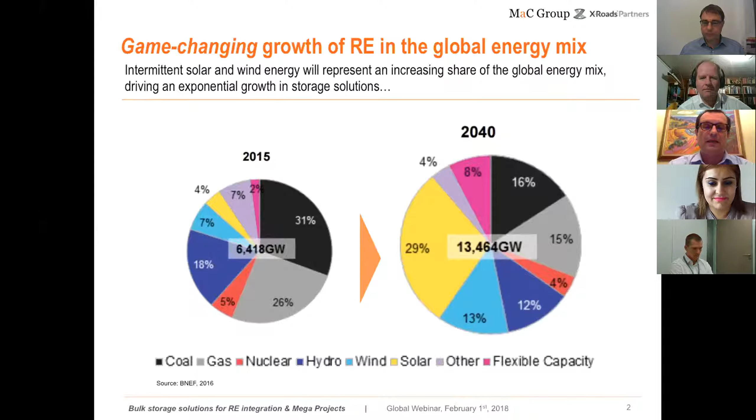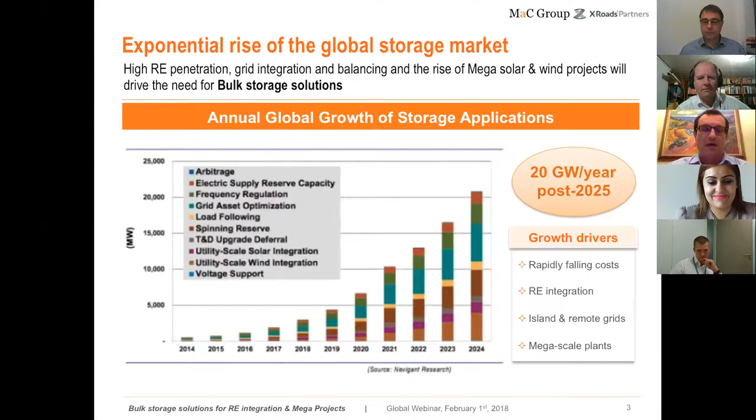The global storage market is forecast to grow at an exponential rate over the coming years, reaching annual deployment of over 20 gigawatts of storage solutions a year by the middle of the next decade. As the graph shows, the integration of utility-scale solar and wind projects will account for a large part of this growth, as will grid ancillary services and load shifting of renewable energy generation to balance electricity demand and supply.

Bulk storage refers to that segment of the storage market that responds to grid-level balancing needs, with storage solutions of hundreds of megawatts to several gigawatt-hours of storage, with discharge times of several hours per discharge. Today, the only fully mature bulk storage technology that can meet this need is pumped hydro storage.

And the strength of demand for bulk storage solutions is clearly shown in that, in addition to the 170 gigawatts of installed pumped hydro storage plants today, there are over 100 new PHS projects in planning or under construction globally, representing an additional 75 gigawatts of new bulk storage capacity.

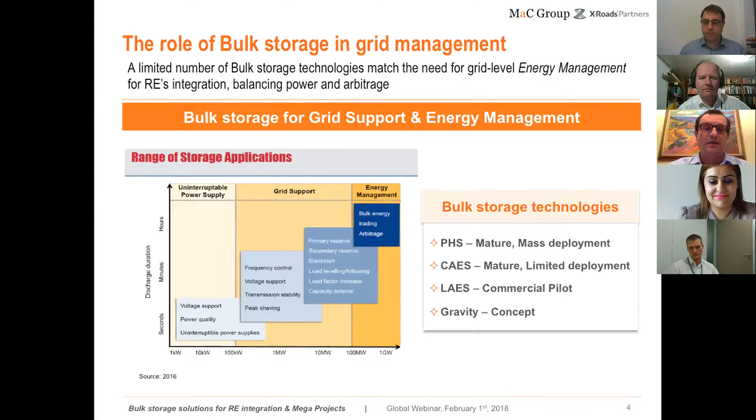However, pumped hydro storage faces significant deployment challenges due to topographical and hydrological constraints, as we shall see later. Therefore, there's been an increasing focus on more flexible alternative technologies, such as compressed air energy storage, liquefied air energy storage, and gravity-based solutions. To date, the commercial deployment of these new technologies has been very limited, but the need for more flexible and cost-competitive bulk storage solutions remains, providing a fertile ground for innovative technologies.

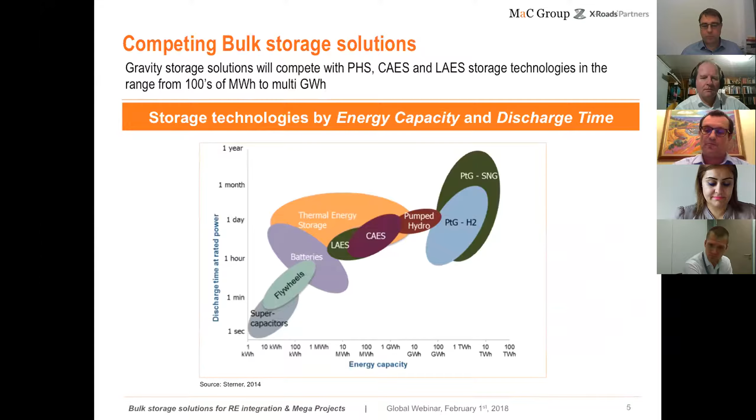In addition to the ubiquitous increase in renewable energy generation, there is a further phenomenon fueling the need for bulk storage solutions globally, and that is the rise of the mega or multi-gigawatt solar and wind project. Over the past years, there's been a clear trend to the build-out of solar plants and wind farms of many hundreds of megawatts in capacity, as well as the planning and start of construction of multi-gigawatt solar and wind projects and hubs. We are now regularly seeing the records for capacity installed at a given site being beaten, for example the planned 10 gigawatt solar PV site being developed by Adani in Rajasthan, India.

We are also seeing the planning and commercialization of nodes of solar and wind energy focused on a national or often interregional market with high capacity, high efficiency transmission networks, allowing the flow of green energy between supply and demand across regions and grids. The example of the Asian Renewable Energy Hub, with a combined 6 gigawatts of solar and wind power generation, aptly shows the scale of future renewable energy production and the consequent commercial attractiveness of gigawatt scale storage solutions.

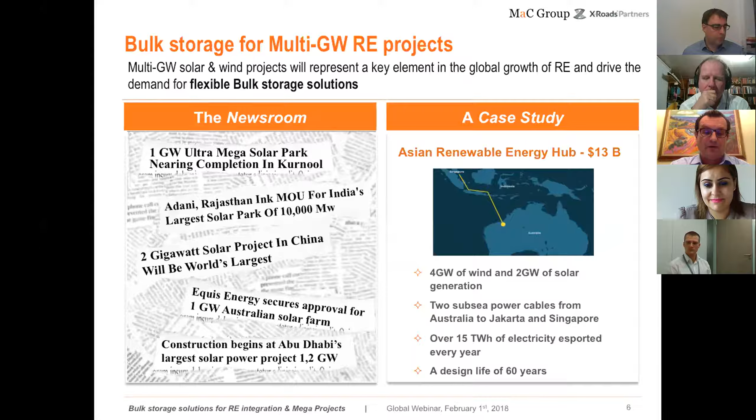In my last slide, one can see that pumped hydro storage solutions are already being deployed to support ambitious growth of gigawatt scale solar and wind generation, such as the Al Hattawi pumped hydro storage project that will support the grid integration of the planned 5 gigawatts of solar power from the Mohammed bin Rashid Al Maktoum Solar Park in the United Arab Emirates. However, pumped hydro storage has many limitations in terms of the sites where this technology can feasibly be deployed, due to the very unique topographical and hydrological conditions that limit the degrees of freedom for its deployment.

There are and will be many, many locations where only more flexible bulk storage solutions can feasibly be deployed. It is here that new, flexible, and cost-competitive bulk storage solutions will find their market. Let me now hand on to my fellow speaker, Oliver, who will discuss the cost competitiveness of alternative bulk storage solutions with some very interesting conclusions.

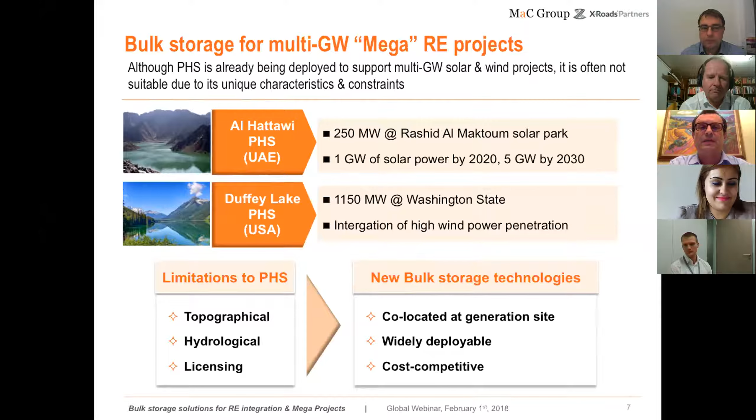Yes, can everyone hear me now? I think it should work, yeah. Yes, we can hear you perfectly. Thank you, Belen. Thank you very much.

I would like to talk about how to assess the cost of electricity storage technologies and then apply this to bulk storage technologies. What I will present is the result of my research at the Grantham Institute at Imperial College, and a project I conducted together with Heindl Energy.

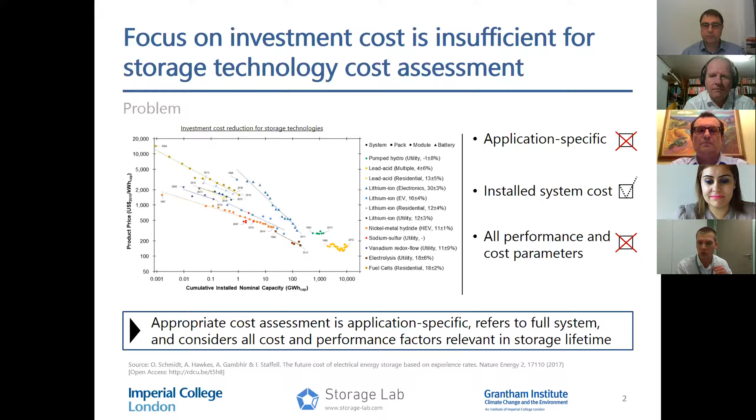And that's because of three reasons. First of all, rarely are these investment costs application specific; they might change whether you want to use one and the same technology for bulk storage or for frequency response. Also, investment costs are not always referring to a fully installed operational system, but sometimes to the cost of battery packs or cells only. And most importantly, we only consider investment cost and not operational cost or replacement cost, and we do not consider crucial performance parameters like the round-trip efficiency of a storage technology or the usable storage capacity. That's why an appropriate cost assessment of storage always has to be application-specific, refer to the entire system, and consider all cost and performance parameters relevant throughout the storage lifetime.

And this is where levelized cost of storage come into play. This metric quantifies the discounted cost of the discharged electricity.

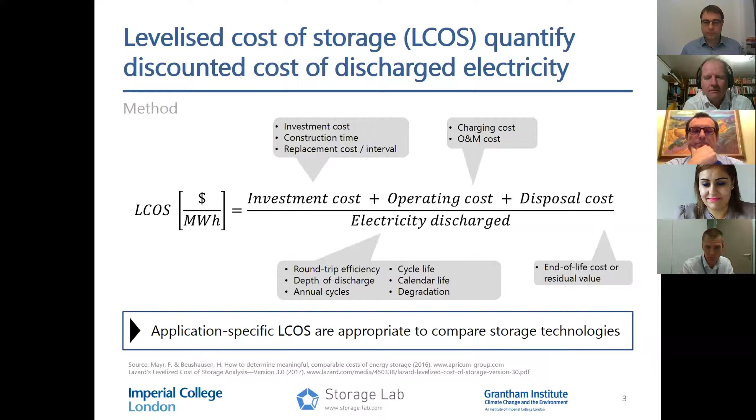Although there has been some great work on LCoS by the consultancy Apricum, or by Lazard's levelized cost of storage analysis, it's still a relatively new metric. And I would just like to highlight a few points you should be aware of.

In this slide, you can see the different cost components of levelized cost of storage, and these are things to be aware of. I'm going to highlight the ones that are maybe not obvious. The first are replacement costs, which sometimes tend to be forgotten or are included as an annual share in the operation and maintenance cost, which is not the right approach to take.

The next thing to highlight is charging costs. In some levelized cost of storage analyses, these are excluded based on the argument that the power price is not intrinsic to storage technologies. People who do that then differentiate between levelized cost of storage, excluding the charging cost, and levelized cost of discharged electricity, including these costs. However, when you do that, you also neglect the round-trip efficiency of the storage technologies. That's why common practice now is to include this and call it levelized cost of storage.

The last thing I want to highlight is the other cost component, which I didn't include on the previous slide. These can be taxes, for example, and they only apply if you have a very location-specific project in mind already, where taxes would matter. If you only want to compare different technologies, you can exclude this cost factor.

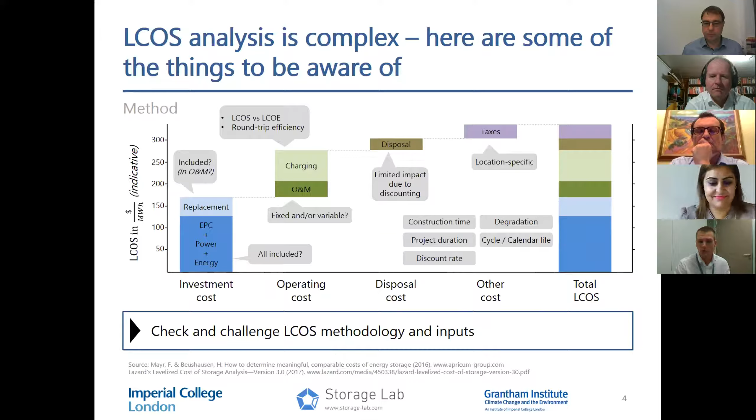So I think now we're ready to perform a levelized cost of storage analysis ourselves for bulk storage application. On this slide, you can see the input parameters that we are using. These are the substance of any levelized cost of storage analysis.

You can see the application parameters that are given by our application, bulk storage, and you can see the technology data that we're using. I would like to highlight that the first four technologies you can see are the most widely deployed storage technologies on the planet, which is why we chose them, and they're also used for bulk storage, in particular the first two.

The data we're using for them comes from, in my view, credible literature sources that build on manufacturer quotes and actual project data. The fifth storage technology is gravity storage, and the cost and parameters you can see here are the ones anticipated by Heindl Energy.

I would really like to highlight—my light just turned off—that you should really take a critical look at these input parameters because, as I said, they're the substance of any levelized cost of storage analysis.

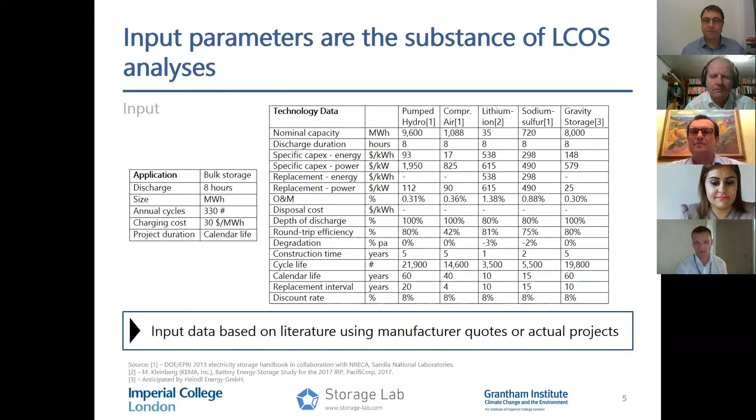Now let's take a look at the results. On this slide, you can see the levelized cost of storage on the y-axis in dollars per megawatt hour of discharged electricity, and on the x-axis, you can see the different storage technologies.

It appears that gravity storage comes out as the most cost-effective storage technology in bulk storage application. This is because of the relatively low costs associated with the components that store the electricity and the moderate cost of the components that charge and discharge the electricity. So the costs are around $148 per megawatt hour.

The next cost-effective technologies are pumped hydro and compressed air at around $200 per megawatt hour. These technologies benefit from very low costs associated with the components that store the energy, but they also have relatively high costs associated with the components that charge and discharge the electricity. Lithium ion and sodium sulfur come out above $500 and $300 per megawatt hour for bulk storage application.

You can see that for all storage technologies, the investment cost component, here called CapEx, is the most significant cost driver. The charging costs, or P-elect, are the second most significant cost driver. And finally, I would like to highlight the error bars. These represent the levelized cost of storage results of Lazard's study in 2016 for the same technologies in a similar application, and we use these to qualify our results.

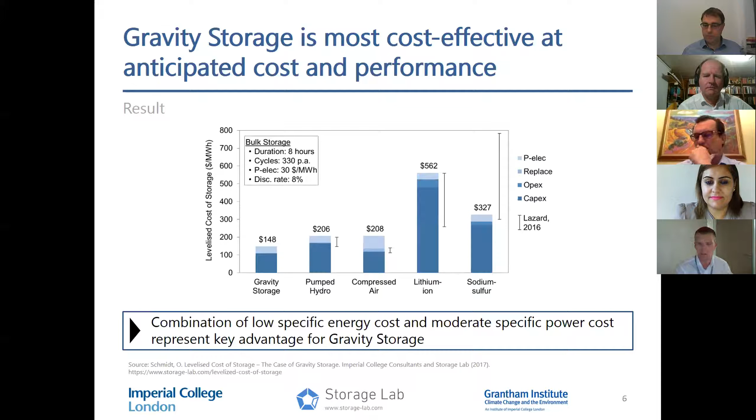For lithium ion, we're at the higher end of the range because we consider the degradation of the technology, which is not considered in Lazard's study. Although the same is true for sodium sulfur, here we are at the lower end because the investment costs that we assume are below the ones assumed by Lazard. So I think this is a prime example of how the methodology, for example including degradation, and the input data are really the substance of any levelized cost of storage analysis and can significantly impact the results.

Finally, I would look at the sensitivity of our results as a result of the discount rate and the project duration. We can see that a discount rate of 4% compared to 8% has a significant impact on reducing the levelized cost of storage for all five technologies, since a lower discount rate reduces the discounting of all the electricity discharged over the entire lifetime of the technology. Those technologies with a long construction time and operational lifetime benefit the most.

Gravity storage with a discount rate of 4% could be pushed below $100 per megawatt hour. And lastly, project duration: if you were only to look at a storage project that you want to operate for 11 years, which in this case would be the construction time and operation time of lithium-ion batteries, the levelized cost of storage for lithium-ion wouldn't change. However, for all other technologies, they would significantly increase because you're basically disregarding all the electricity that could be discharged over the operational life of the technologies. This again affects those technologies with lifetimes of up to 60 years the most.

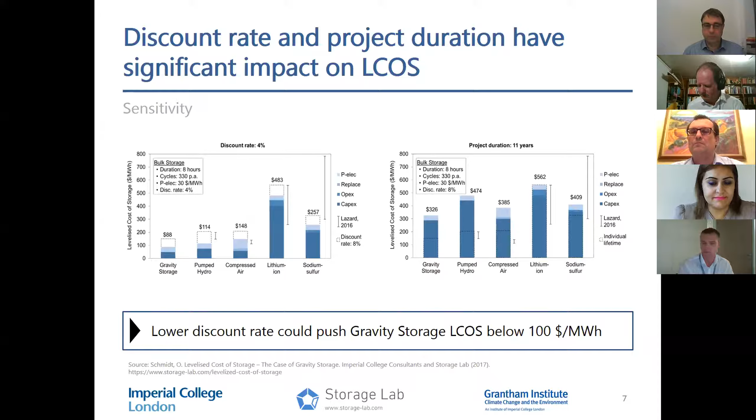And this is the end of my contribution. I'm looking forward to all the questions you have. I also invite you to look at the website of Storage Lab, an independent research hub led by me, to see all the findings we have about electricity storage technologies. Thank you.

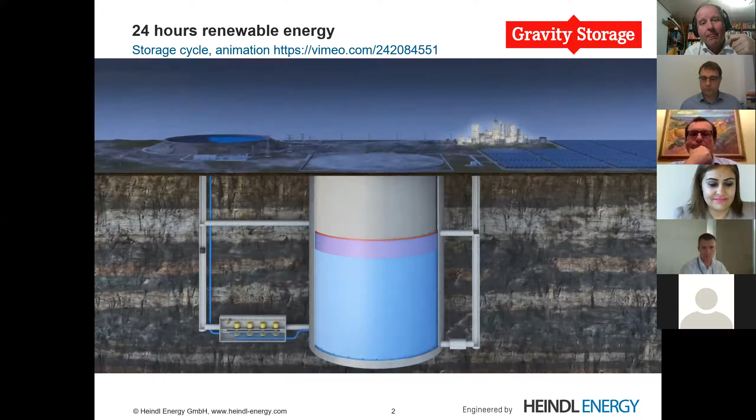The first thing is, let's look into the cycle of this storage for 24 hours. What happens during daytime: we have solar, and the energy is going into our pumps, pressurizing water below the piston. This piston lifts and stores the energy in gravity. Now at nighttime, the pressurized water goes through the turbines, generating electricity and supplying it to the grid, so that we have electricity during 24 hours. So this concept, let's look a little bit deeper in there. The really interesting part is the piston.

That is natural rock that was already there, and it is excavated by us at this place. So we don't have to move too much material, and the piston itself is stabilized where necessary.

Below the piston is the pressurized water. We are working with a pressure of about 70 bar, which means the pressure is very similar to pumped hydro. That gives us the advantage that we can use well-known pumped hydro technology, including the well-known efficiency of the systems.

We also need a water pond to have the water available, and we bring the water between the pond and the lower part of the piston. That means we have to fill it once, and then it works forever with more or less the same water. So we don't have a water problem in a desert, for example.

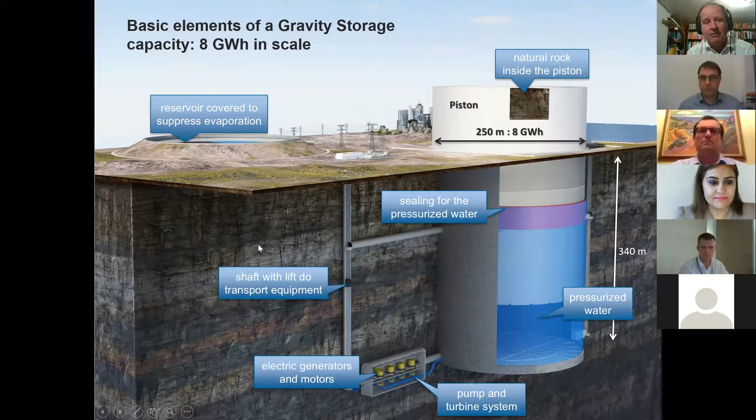The size matters here very much. If we have 250 meters, we have 8 gigawatt hours of storage, and it is 340 meters deep. That's quite a bit deep, so we have to understand how we build that system.

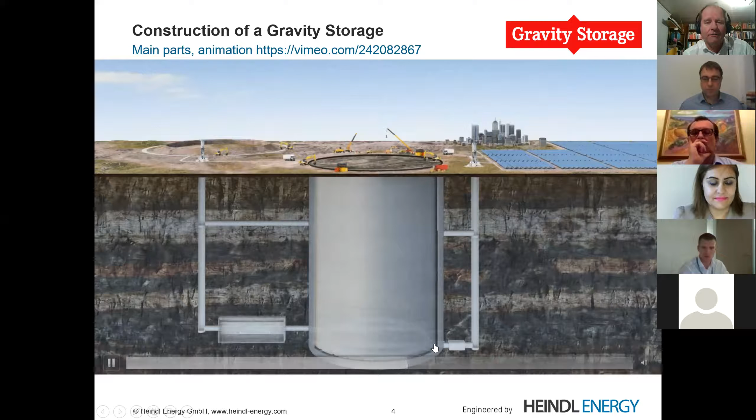Here we have a short animation. After clearing the site, we start at the center where the piston is coming, and we drill down shafts for the equipment. Then in parallel, we meet down there and cut the lower part of the piston. Then we bring in building for the turbines. The last big step is introducing the sealing ring, which is a very interesting part. And of course, the water pipes for high and low pressure.

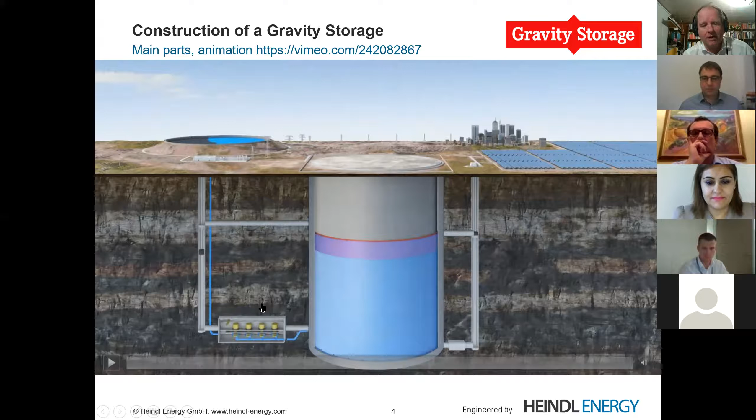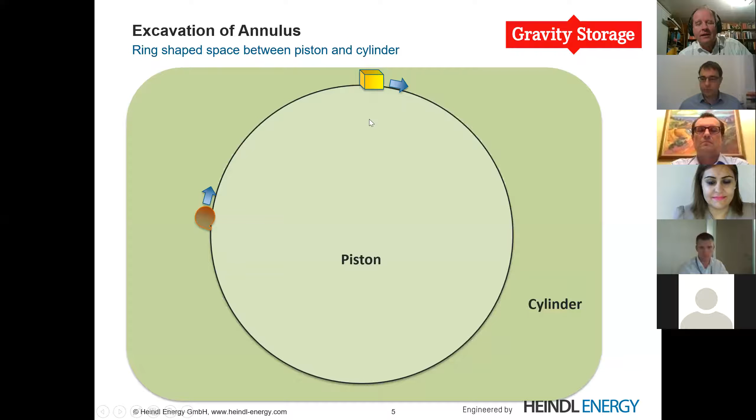This system now in some more detail. The excavation of the annulus needs equipment that can cut hard rock. There are three ways available today: drill and blast, which we don't prefer because it may destroy or weaken our piston; a cutting machine as well known in the mining industry; or a wire saw, a new and very efficient way to cut rock.

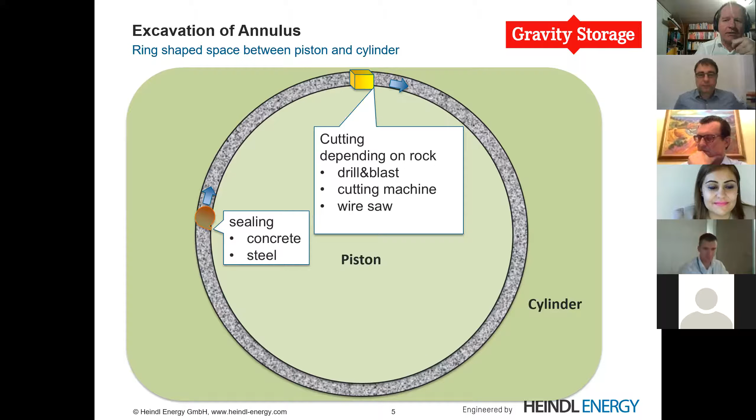Then the cutting machine goes down deeper and deeper, all the 340 meters. The other thing we have to do is make the surface of the rock waterproof. We don't want to interfere with the environment, and we don't want water spilled out in the high pressure part. So we use concrete and steel, which is the material of choice because it gives us easy production.

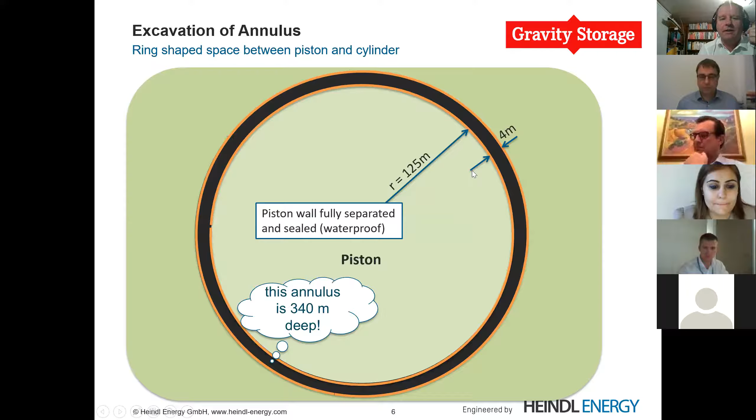So after that is done, we look into an annulus that is 340 meters deep, and we have now a piston of 125 meters with an open width of 4 meters. How do we make that work for the bottom? That is the separation of the piston base.

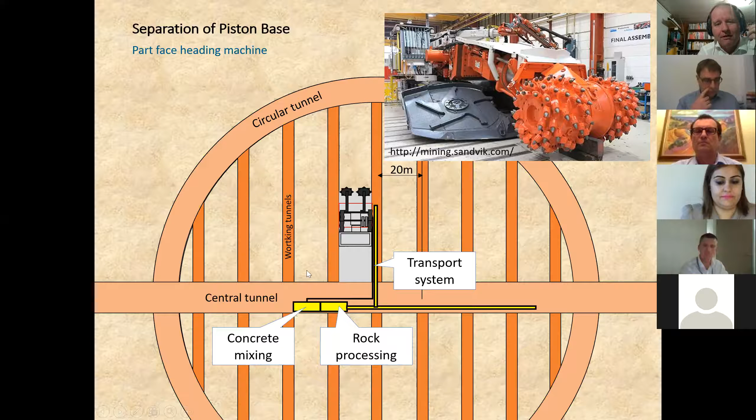Here we use a central tunnel and some smaller tunnels for work, along with concrete processing and a so-called part face heading machine, well known from mining. Now we have to cut these pillars here, and we'll look into the detail of how this is operated.

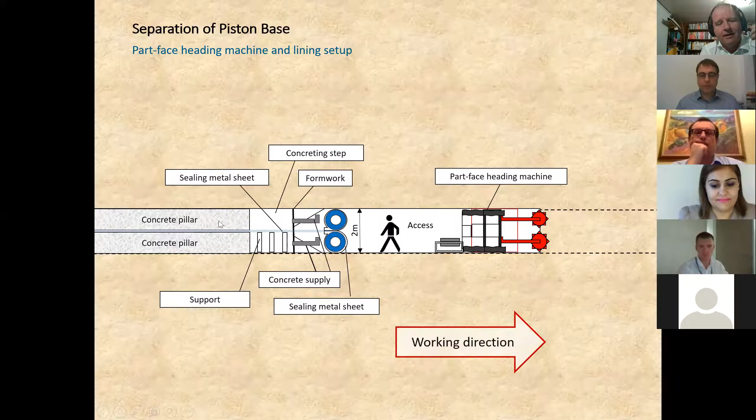We cut through the rock, and we don't want the rock left open hanging here. So immediately after that, we introduce two shields of metal and concrete at the lower and upper side, resulting in very stable pillars. The sealing and the material of the seal is more or less the same as you see on a conveyor belt.

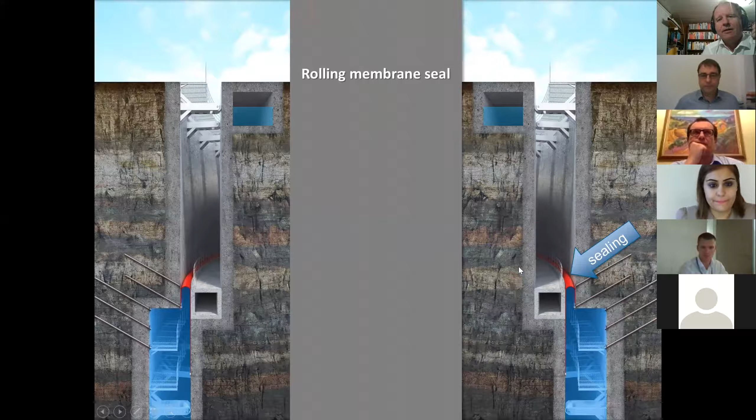Now move up, and you see the seal running here along. The advantage of this technology is that we have a self-centering system. We can control the high pressure because all this material is well known.

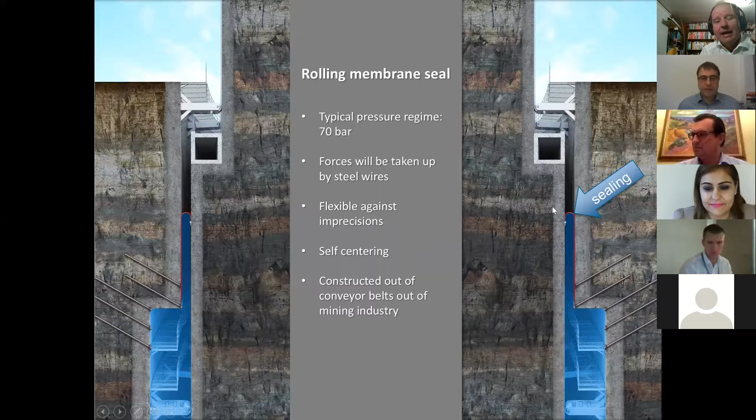Where can we build something like that? The point is that we need solid rock without too many faults. That is available in many places. We did a global study together with DMT, about 120 sites where boreholes were available, and we found that about half the sites have suitable rock, with some really excellent for our technology. So we would usually start at the best places, and I think we have enough places.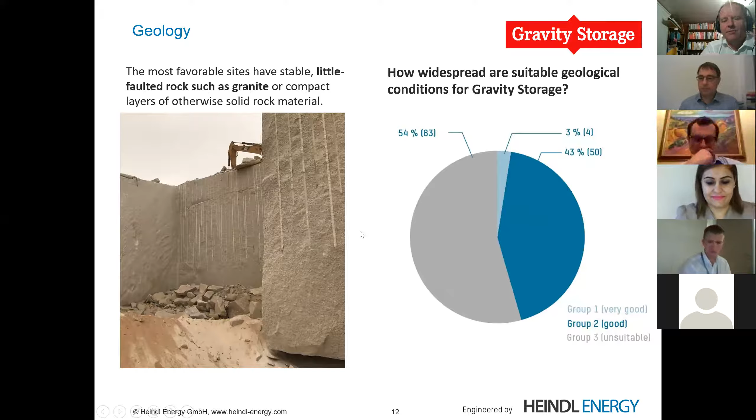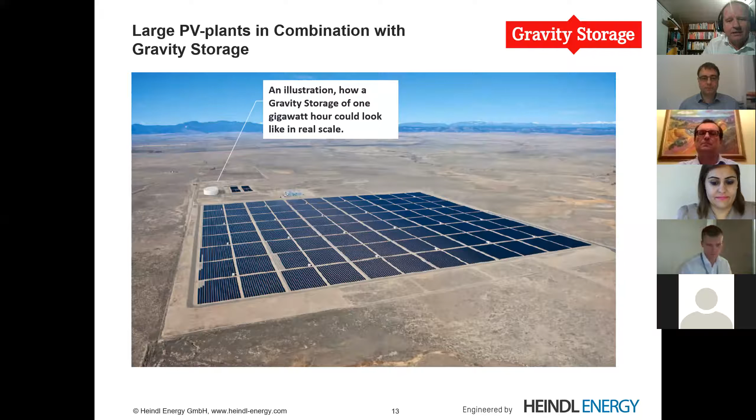To give you an impression of how large the system is, here we have a big solar farm, and we see the comparably small gravity storage. This storage is enough to store a whole day of solar energy for this site, which is 1 mile by 1 mile and 120 megawatts.

Come to the conclusion: what do we have with our system? We have the applicability that we don't need elevations as we do with pumped hydro, which is a very efficient way. We have more than 40% of the Earth's surface that can be used, so we'll always find a place to do it. We have very high efficiency.

That was interesting for the levelized cost of storage, as we have learned. And we can use the system for many other services in the grid, for example black start, since rotating masses are very convenient.

Our discharging time can exactly be tailored to the operators, so we are not dependent on the amount of rock. We can use as many turbines as we think is the best solution for a special application.

And the last thing I want to go into detail on is sustainability. We have minimal raw material, just rock and water. Even if we dispose of the system at the end of its lifetime, there is only rock and water, so that's not a big problem. We also have a small land footprint and a small use of water.

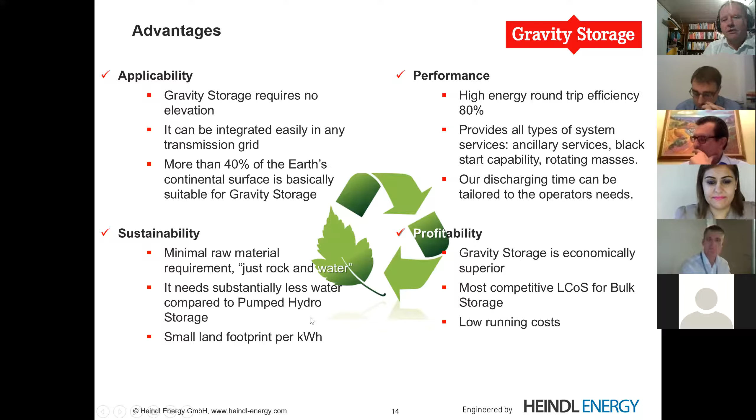So that's it for my part. Thank you for your attention.

Thank you very much, Eduard. There have already been a few questions about whether this is being done anywhere. So I think that this is exactly Robert's cue. You can just show us your screen, please, Robert. And I have to say, guys, you are doing great for time. You're doing a great job.

Thank you very much, Robert. Go ahead. Okay, thanks a lot.

Hello, everyone. I would like to add some information about the status of our development. And then finally, I would like to be more detailed on the economics of this system. And I want to invite you and trigger a discussion about how economically viable bulk storage is and what role it can play in the future supply.

Here you see a graph about our planned path for the size development. As Eduard mentioned, it is important to understand that this system will only be economically feasible if you have a certain size of diameter. So we have to develop this technology in several steps.

We did a lot of research in the last 4 to 5 years with theoretical studies and scoping studies, etc. Now is the time we want to transfer this into a proof of concept. That means we want to build a small edition of this system, 20 by 30 meters, and it will have no impact on a certain business case in the grid or so. It is just about testing the system and the sealing.

After this is completed, hopefully by 2019, we want to have a first pilot project, which will actually be connected to the grid, with about 200 or even 300 megawatt hours capacity. But still, we want to go for more and plan to have a first commercial size with 150 meters.

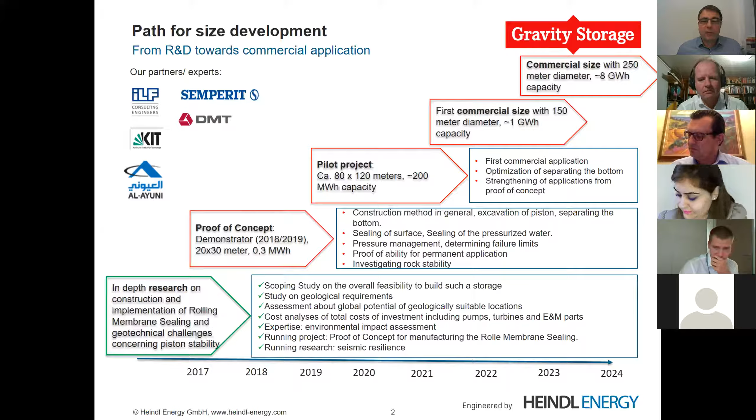On the left side, you see, just to mention it, a few partners we've worked with for years. We are a team of coordinators of several development projects and research efforts. We have a very close cooperation with Al-Ayuni, a construction and contracting company from Saudi Arabia. They have a lot of quarries, and they offered and invited us to use them to build such a demonstrator. Some of you may know that we have very nice geology, good granite, in Saudi Arabia.

It is a country with a lot of development in renewables, and they have the techniques and all the companies there to build this. So thanks for this invitation.

This proof of concept is to prove the technology, especially the parts which are very new. This is mainly the sealing, because all the other components are quite well known, either from mining, tunneling, or from pumped hydro. But the sealing, as Eduard showed, is tricky, and that's something we have to test in real scale, one by one, as we will use it in the commercial size later on.

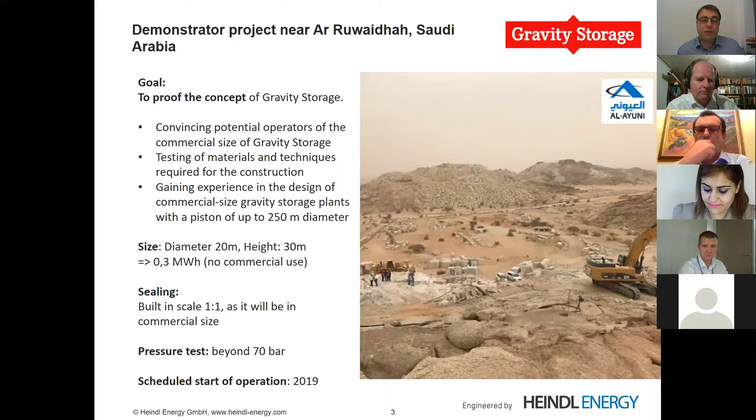We also create pressures beyond 70 bar with a special construction, so we can invite everybody to test themselves, to make measurements, to do research, etc. The plan is that we can start operation of this testing site in 2019.

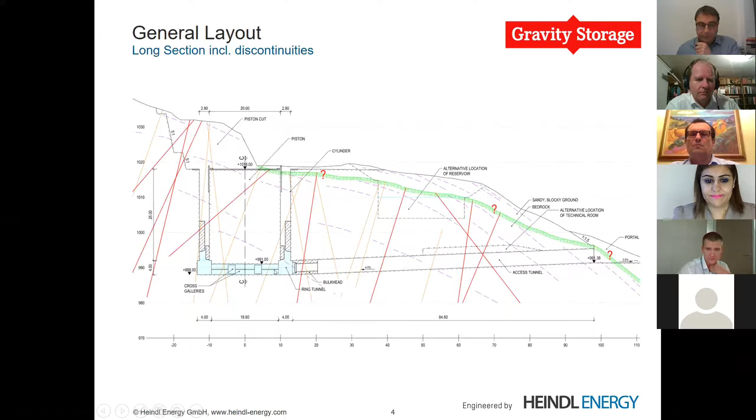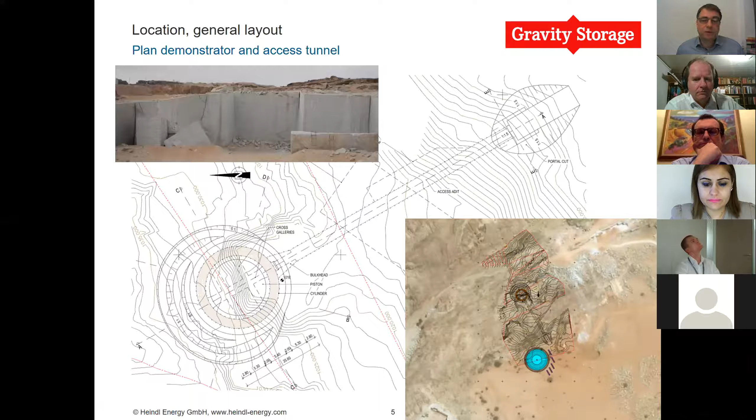This is a view from the top, and here you see actually the site where we want to build it. And from the top, you see the water reservoir in the blue, and here's the terrestrial survey. And so that's the way how we do the assessment of sites when we do this project.

Okay, let's talk about money. The revenue models for gravity storage are the same as we know it from bulk storage, but I think we have to discuss what are the revenue streams for bulk storage in future.

You probably know that we have three basic models, like a traditional arbitrage model or PPA. You produce during the day with wind or solar, and you take part of it to transfer it to the night. And the big vision behind bulk storage and renewables is that sometime we want to be able to deliver 24/7 with renewables. This is something which is highly attractive in terms of economics. And that's why we definitely will need bulk storage to cover these huge amounts of electricity.

But you know that a lot of grid operators are really worried about the stability of the grid. And we analyzed what is the reason why at present so many pumped hydro storages are in planning. And the reason is that they need capacity to balance the grid, to provide balancing power, to do voltage support, etc. And this is very important, and it's getting more important.

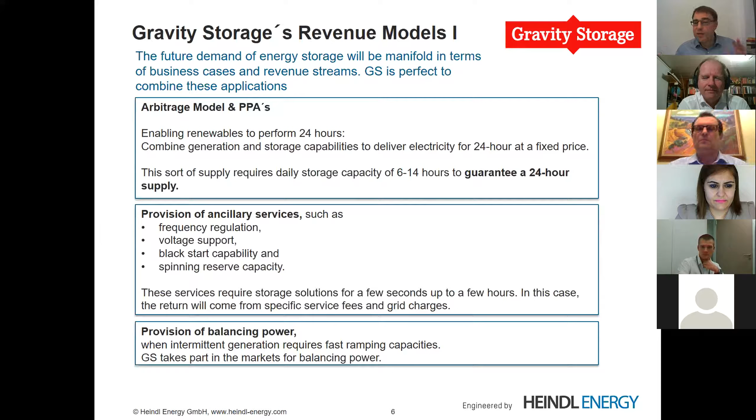That is to prevent blackouts. And as you know, it takes one or two blackouts, and the damage of the blackouts is far more than the whole storage would cost. So this is a thinking we see a lot in market models, and as you have probably heard, even the EU now wants to allow storage to be run and operated by grid operators, which was a complete no-go just two years ago, and you see how things are changing towards storage.

Now, just the last slide on the figures concerning gravity storage. We did a cost study and developed a financial model. So the condition is 8 gigawatt hours capacity, and the costs for charging power is at 3 US cents per kilowatt hour.

These are the very important inputs and assumptions. You come up with CapEx of 1.7 billion US dollars, calculated in euro at a German cost level, 2016. Of course, these CapEx will vary depending on what region you will build it. The OPEX, and this is interesting, is below 1% per annum as far as we can calculate. It includes mainly the costs for maintenance of the sealing, and even once in a while you have to change the sealing material, which will be perfectly possible.

So the revenue, of course, depends on how many cycles you will run and what is the price for the discharged energy. We assume 330 cycles a year. The rest of the days you have maintenance, and we assume that you sell it for $100 US per megawatt hour, which is quite fair. We know that a lot of the new pumped hydro storages have to sell at far higher prices.

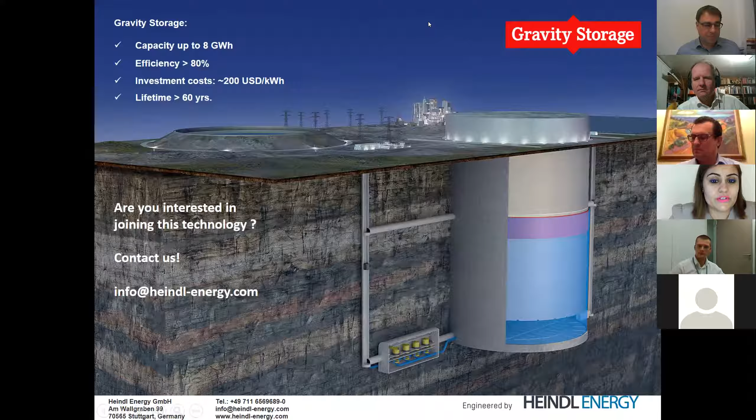So I'm going to start with one of my own. I know this may be basic for some people listening, but I think it's important: can anyone answer succinctly, what is the difference between bulk storage and large-scale storage? I think there may be some confusion about that.

So I don't know who wants to take it. Robert, you want to take it? You're looking really propped up for it. Just make sure you mute.

There you go. Okay, I think there is not a real difference. The point is, large scale is usually everything beyond batteries, or everything beyond hundreds of megawatts. And so then you store a lot of stuff, and that's bulk. But I think there is not a technical difference - it's just the same, different wording.

Okay, thank you very much. And now I've got a question that came in the chat: the Californian market may be one of the earliest for bulk storage - do you have a site for gravity storage there, or proof of concept? And I'd like to widen this out - they mentioned California - are you guys planning anything in California? And also, what other places or countries are good for this type of technology?